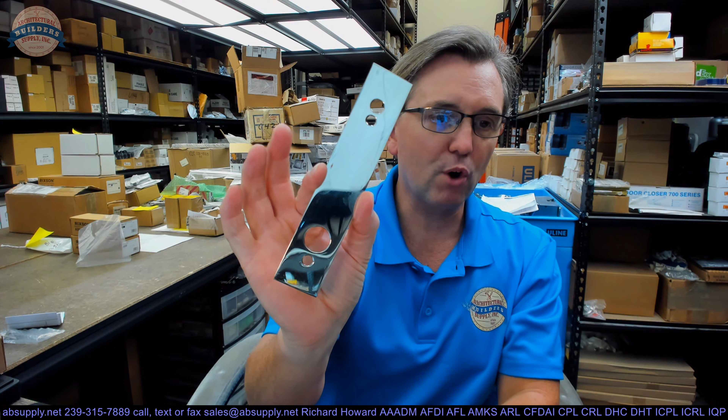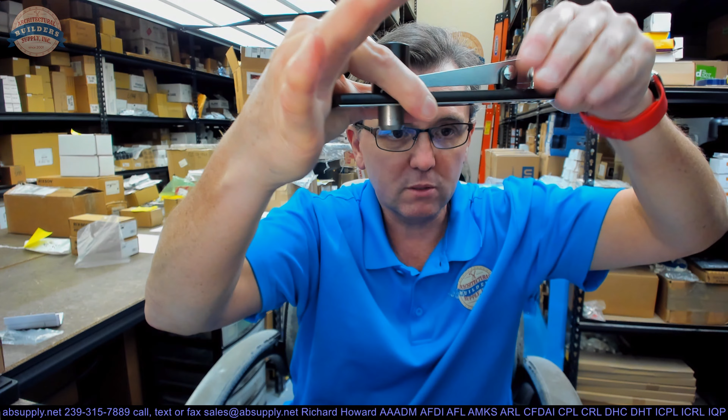That's going to fit over this unit just like that. Spindle's going to come out. You've got 2 holes here for the screws to hold the plate on. Okay, and as I draw that bolt, I'm going to drop my spindle down. And you do that with that slotted screw that's there. Really simple, really easy. Now, I think what we'll do now is let's switch to the screen view where we can take a closer look at all of the supporting information.

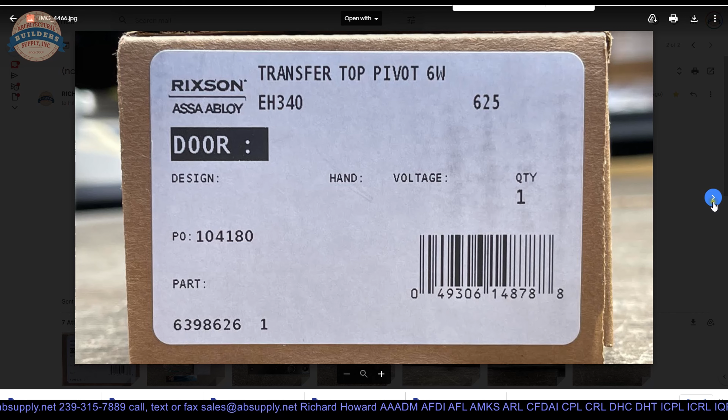Okay, here's the item that we are looking at, and let's take a look at some photos that we have posted down below. Here is the picture of the box, the label from this order, the contents of the box, header portion and the door portion. The header portion with the pin extended. By the way, that extension is, and it'll be listed in the catalog, but its maximum extension is probably about 3/4. Indeed, that's what it is, 3/4 inch. So you're going to have a 3/4 projection into the top of the door, showing the hole that will accommodate easily those 3 pair of wires.

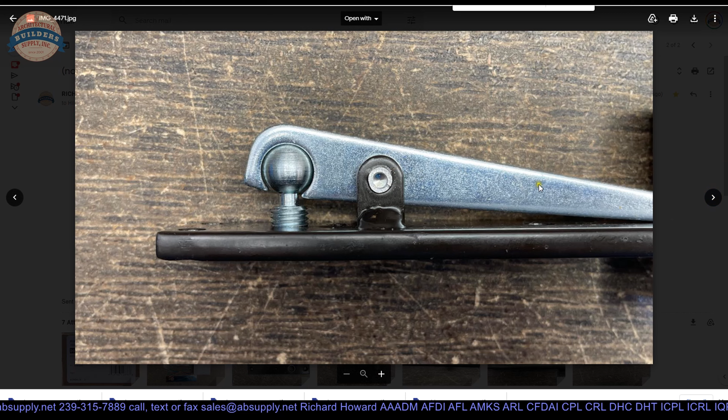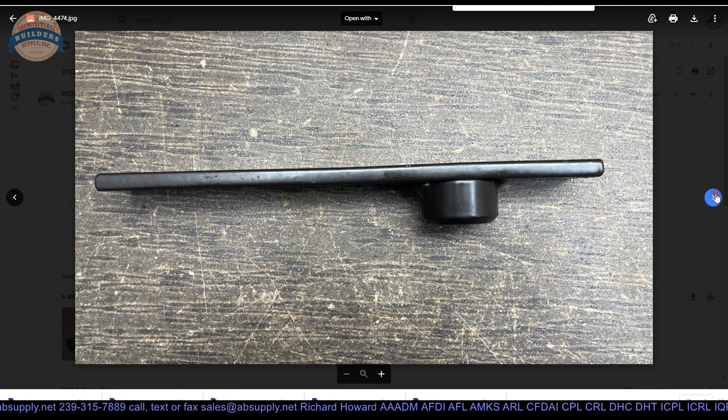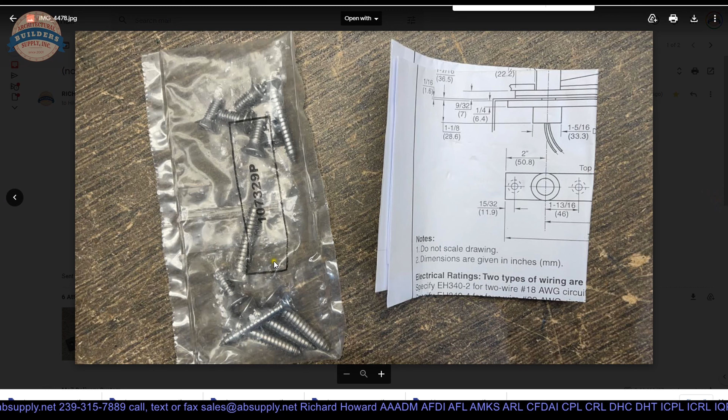The walking beam portion, that's what controls the spindle, the top pin going up and down, in and out. That's showing it retracted. We have the top door portion here. Its side view. Thrust bearing there. The finished plate. Again, I believe that's 629. Your wires, your 3 pair. The colors don't matter in the sense of they're just color-coded for your identification end to end. And then, of course, the screw package and your installation instructions.

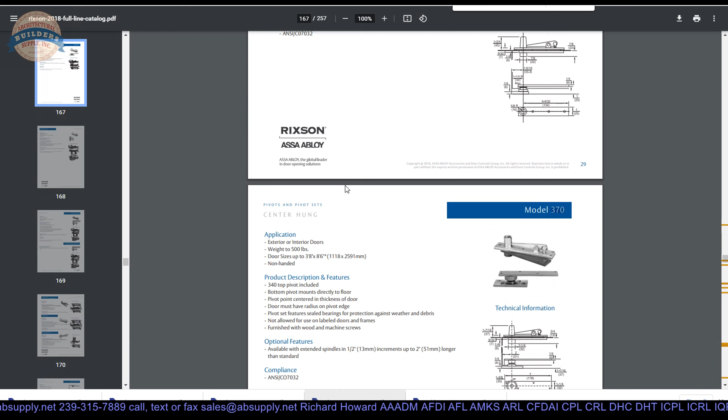Okay, now let's take a look at all of the supporting documentation. Let's go through these documents in no particular order. This would be the cut sheet, the EH340 center hung. We discussed that at length. Just to put a finishing touch on that, let's go to the item that we're looking at, the link here to the manufacturer's page. Pull up the full line product catalog, and then we're going to get to the pivot section. This catalog has the pivots starting at about the 138th page of the document.

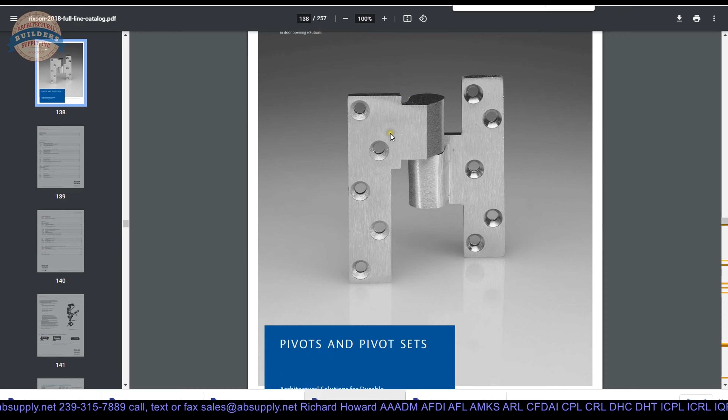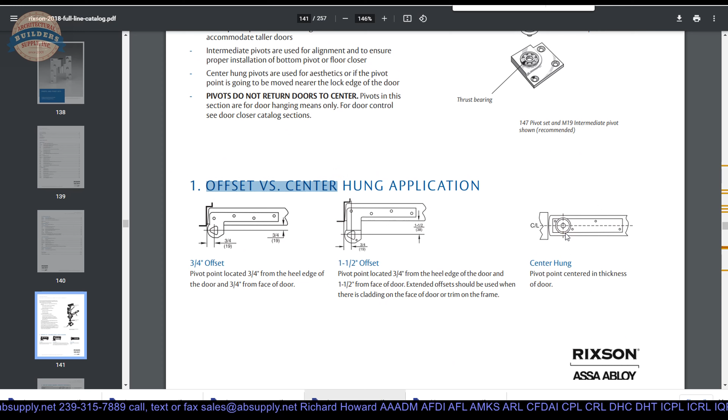The point is in the beginning of the catalog, it will give us an explanation between offset and center hung. It's all where the vertical axis of pivoting is in relationship to some reference point of the door. If it's center hung, the reference point is the center of the thickness of the door, and then the dimension from the jamb is determined per the template, but it'll always be in the center of the thickness. Does it have to be? I know that I've done unusually thick doors where I knew the client was not putting that in the center of the door. I would say it doesn't have to be, but the hardware is definitely designed to not carry a lateral load in that sort of fashion.

So at the end of the day, I wouldn't personally feel that it's a major error or mistake, but unless there's a reason to bias it towards one side or the other, just leave it right in the center. I have had it scooched over to accommodate some weather stripping that we've put there, and that's worked out without any trouble.

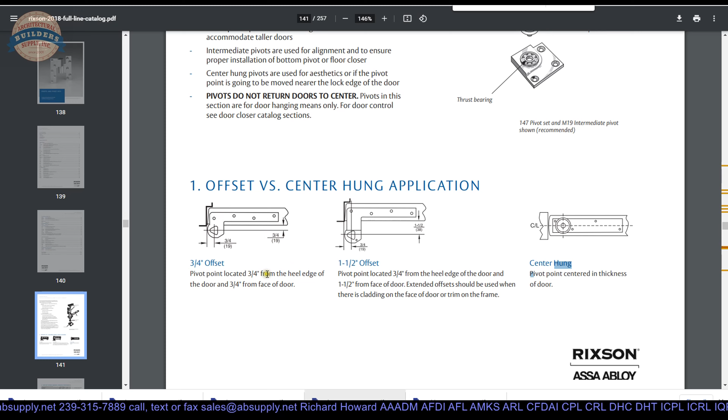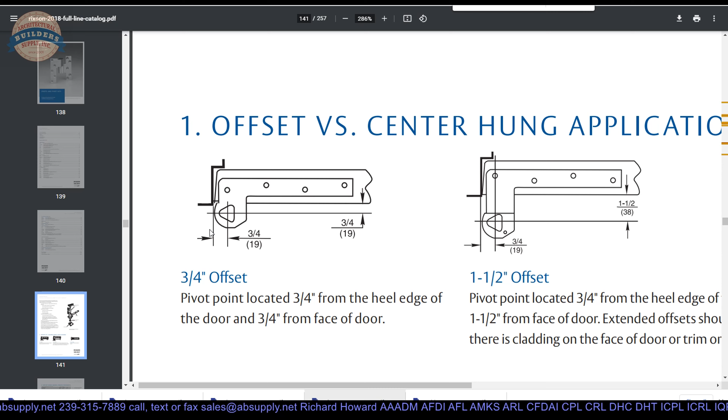If it's offset, that reference point is different. It's now the face of the door on the pull side. And we can see that right here. The face of the door to the center line of the vertical axis of pivoting is either 3/4 inch or 1.5 inches. Those are the only two sizes that you'll get. And the difference between these two is the 3/4 inch offset is by far the most common. That's what you're going to see everywhere. Unless you specify an offset, it's going to be understood as a 3/4 inch offset. The issue with Rixson, as far as my experience goes, is that they use the term 3/4 in part numbers.

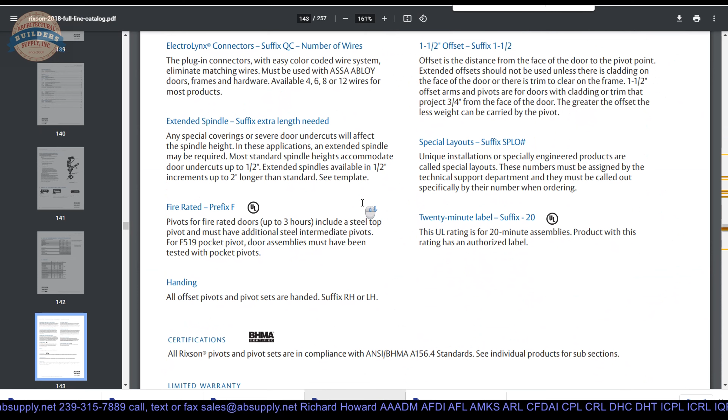So 3/4 can be an offset, or it could be part of a part number. So let's just scan through here and look. So they've got a 117-3/4. Well, you're tempted to think that 3/4 means something. No, it doesn't, in the sense that it doesn't mean anything dimensionally. It's just the part number.

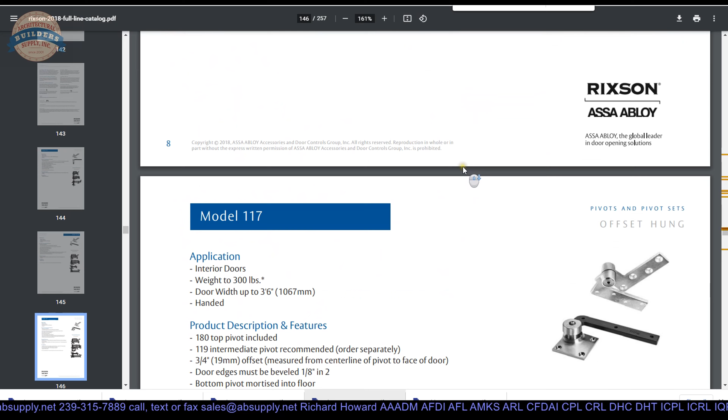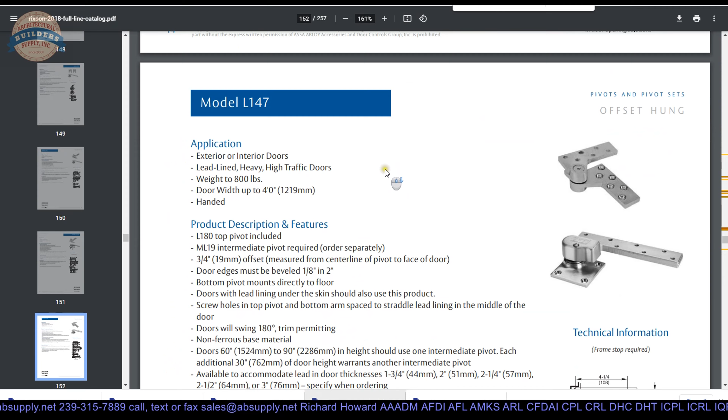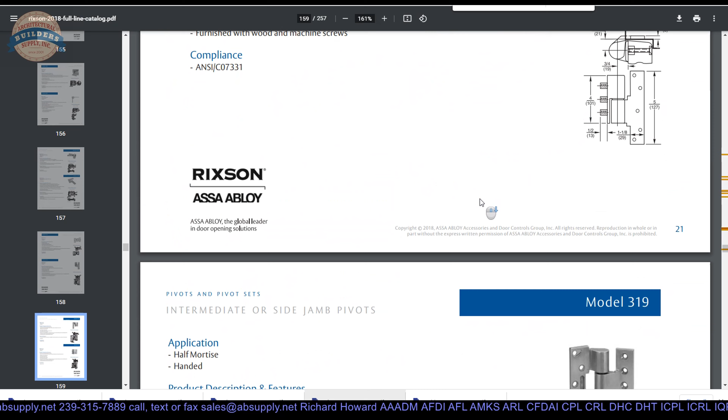So as we scroll through here, there's one with a -1/2. Okay, so half of what? There is a 117, but that's a 117-1/2. The point I'm making is, and I'm going to get to it because we're in the intermediate pivots. We're going to scroll into the offset, the center hung pivots now.

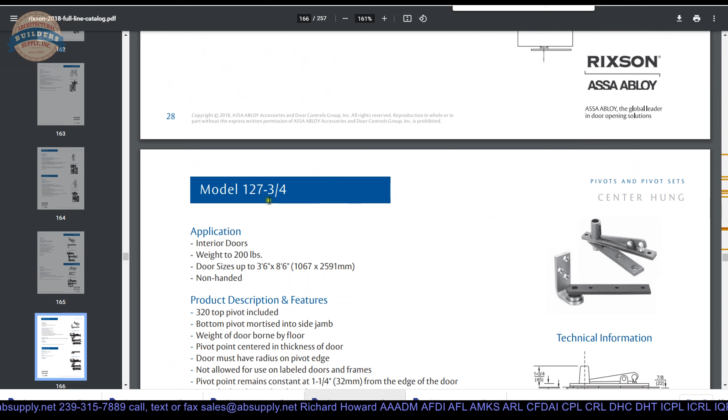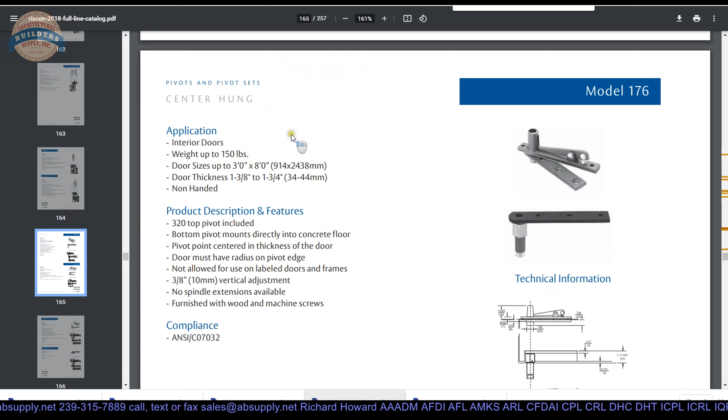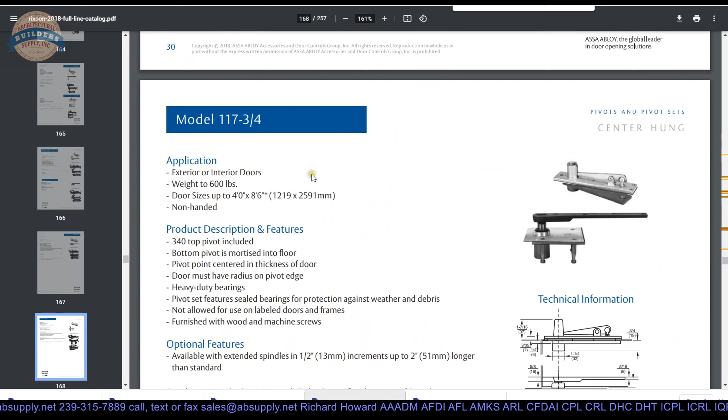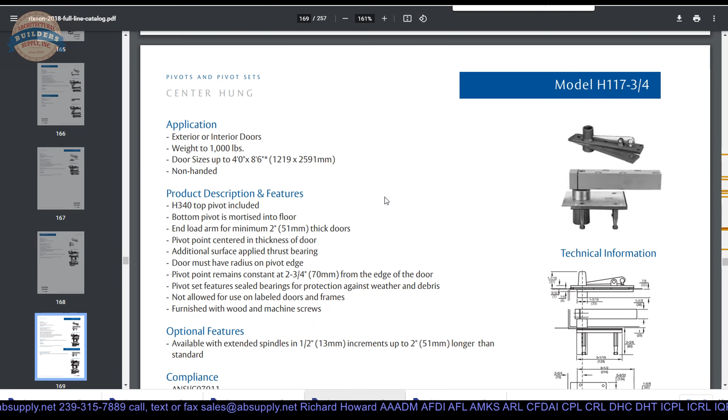So here's a 127-3/4. That can be confusing because nothing on here is really 3/4 inch. That's a center hung pivot, but why they call it -3/4, I just don't know. 127-3/4, 128-3/4. There's obviously a reason for it. I just don't know what it is. 117-3/4, H117. So be mindful when you're using Rixson part numbers. Be wary. That does not mean 3/4 offset.

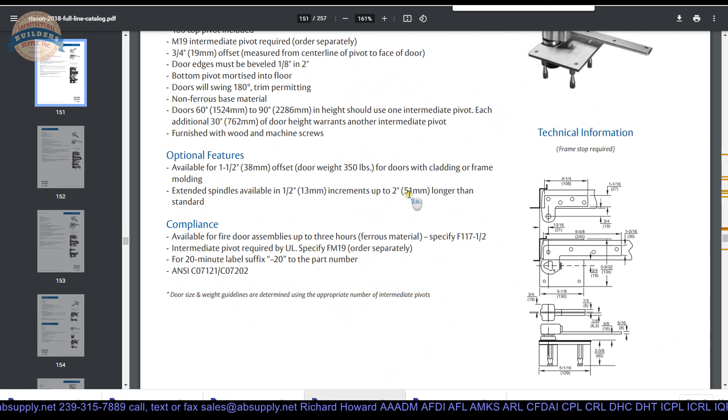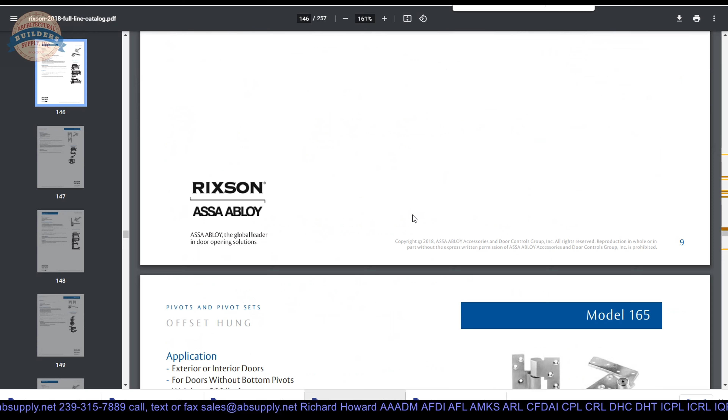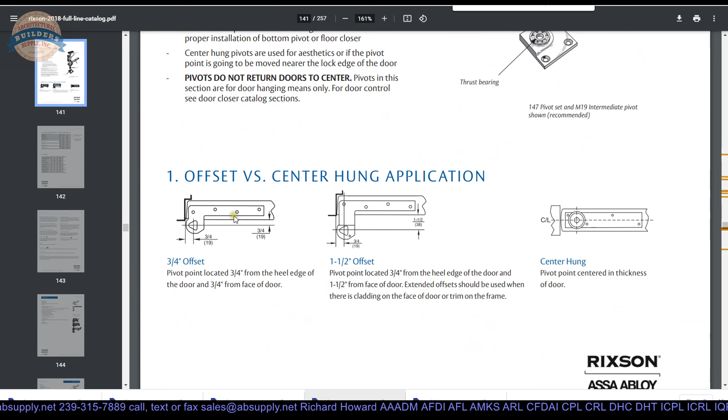I've bumped into that in the past, and I know very early on in my career it was something that I was confused about. I can tell you that one of the best things you can do to edify yourself is to just read the manufacturer's catalog. These people, Rixson, and all of their sister companies, have been in the business of architectural hardware for decades, and their approach to explaining it is tempered on decades of experience. So that's our application. 3/4 will be considered standard.

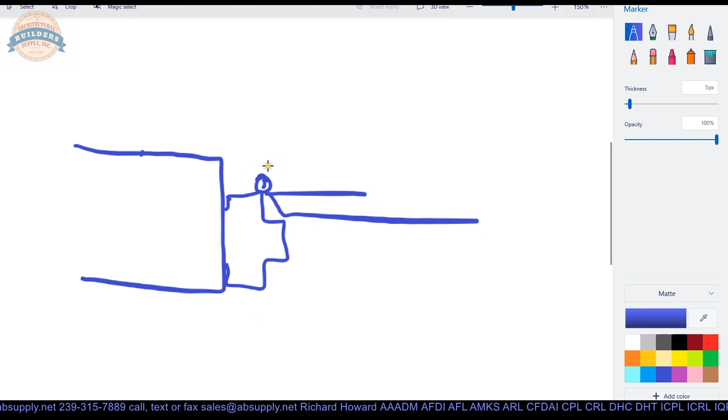Now, 1.5 inches, why would you use that? Well, you would use it when you need to move the vertical axis of pivoting out and further away from the face of the door. That could be because you have unusually thick casing. Here's an example. What if you wanted this door to get to 180 degrees? Well, if you have a 3/4 inch offset, you're going to get out to about here before anything happens. That'll be your maximum degree.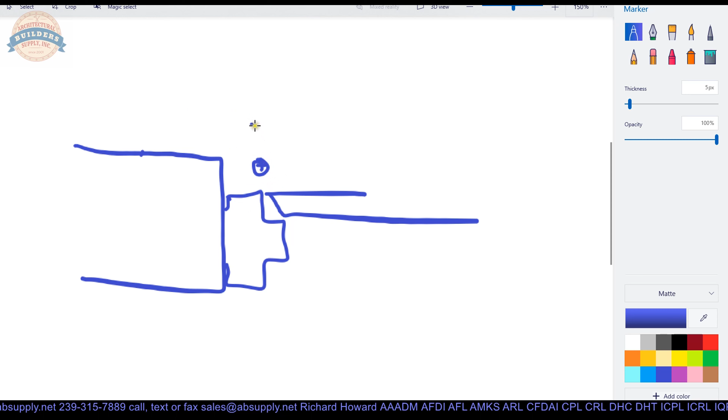So when you move that vertical axis of pivoting further away, say 1.5 inches, you will then be able to get your door out and around. So if we go from 0 to 90 to 180 degrees, that's why you're going to want to relocate that center line further out.

It could also be that you don't have a need, and I've done this in the past. You don't have any sort of clearance problem like here, but I've done work for a client where they took a 1 3/4 thick door and then applied to the face of that 3/4 inch thick MDF, because they were running the baseboard along the face of these relatively concealed doors. And the application would call for an otherwise standard pivot, but I didn't want the client mortising into this MDF base.

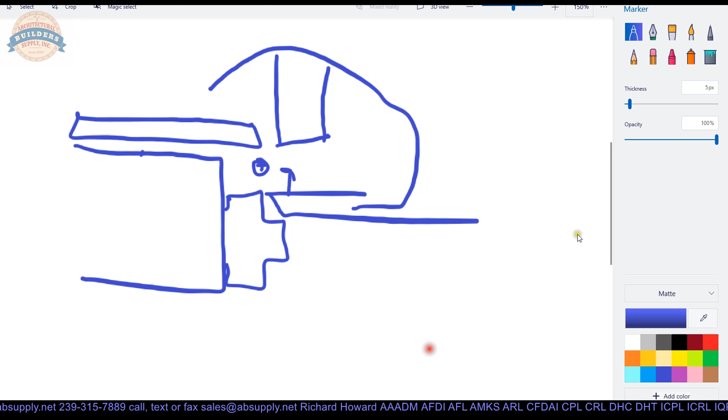So we went with a 1.5 inch pivot just to move the hardware back to get it under solid wood to mortise to. I can show you here. I'm going to scroll through this video to show you the client's application. There it is. Baseboard, which is MDF. Nothing that you could screw to or mortise to. So obviously a pair of doors. And that's exactly how we solved the problem.

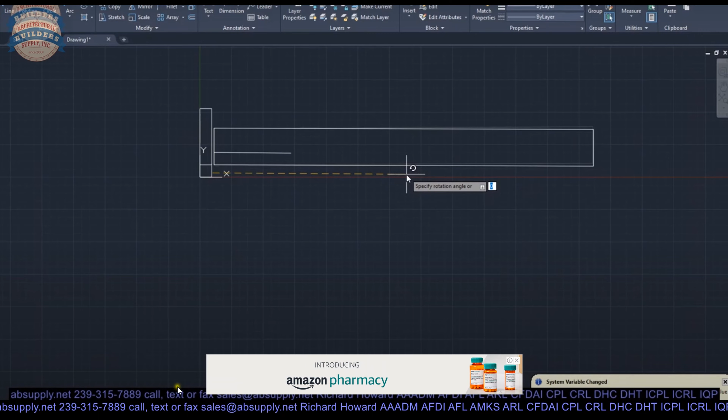What happened is the client did a job where they used concealed hinges. And he found out that it didn't work for his application because he wanted the doors to go past 90. And that means relocating the center line, which is exactly what we did. And then I basically put together an AutoCAD scenario showing the client when we moved that vertical axis of pivoting, because it was stuck.

Sorry, that video keeps moving on me.

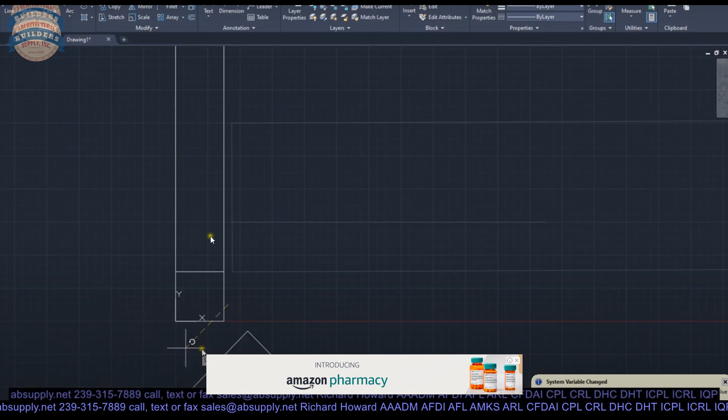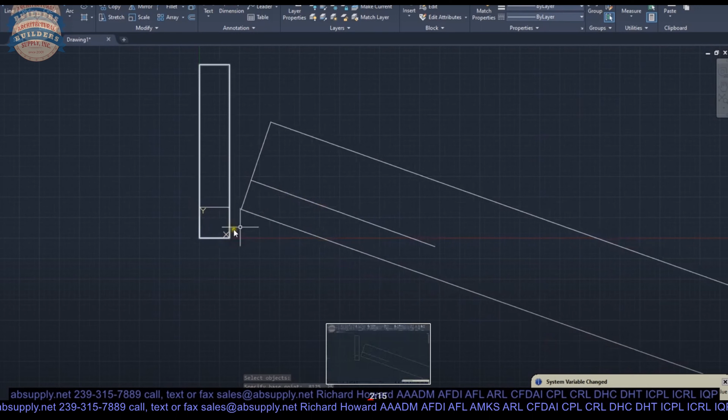He was stuck with what he had in here. So we're moving the vertical axis of pivoting out here. And what we can do is supply you with the necessary hardware to do that. You're going to see the pivot point down here. And that represented the added 3/4 inch thickness. This line represents the additional 3/4. The arm is going to go.

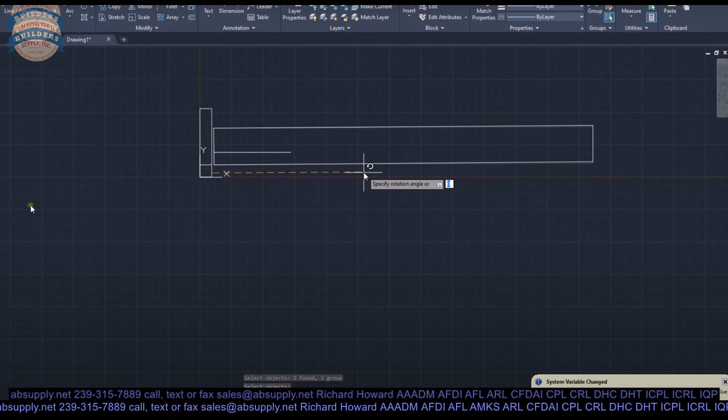And just drawing in the pivot to show how we're going to get around that material. Can you do it? Absolutely. Is it going to work? Use a pivot. You cannot use an invisible hinge. So we also had another application where a 1.5 inch offset was used, where we did have a clearance problem, and let's take a look at that. I'm going to pull up some pictures of that project.

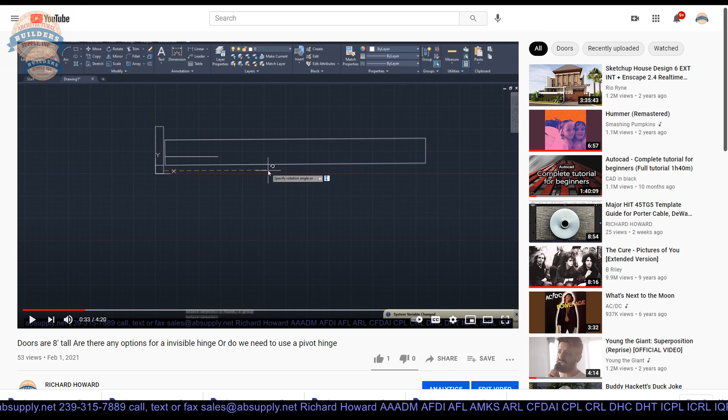And actually, this is not an uncommon problem. We've had to do this in the past where there have been, frankly, rectangular, regular shaped doors within a deeply inset opening. And while it's just rectangular at the top, it's the same problem. You can only open the door so far before it hits that outside.

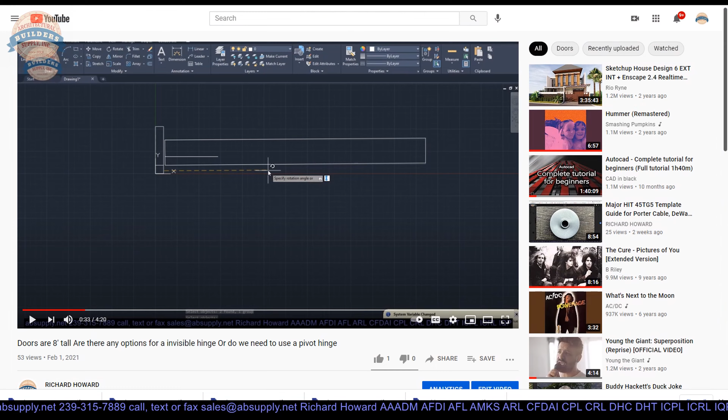That's a detour when it comes to offset and center hung, that's for sure. So let's go to the next document.

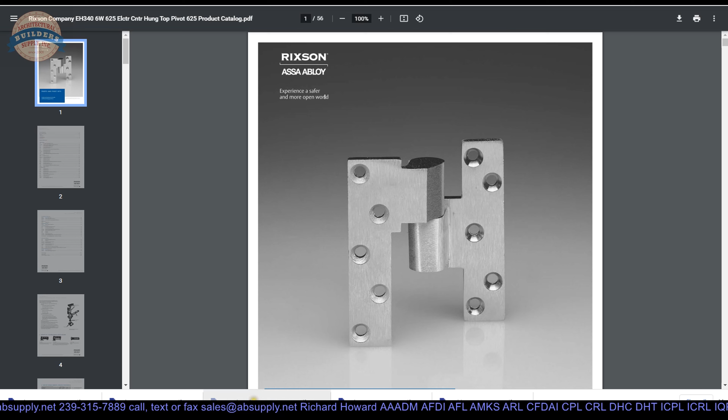This is the product catalog. This is all things pivot hardware related. I don't think that we need to dive into that anymore, but let's finish up our cut sheet, which is where we were before I went down that rabbit hole.

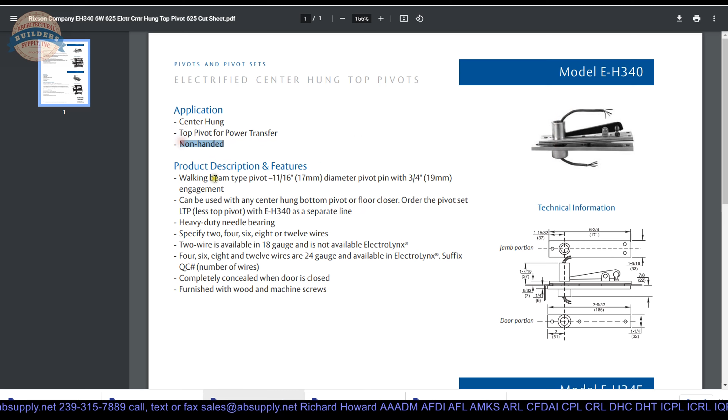Top pivot for power transfer. You're going to be able to fish wires through that top pin. Non-handed. Center hung is technically non-handed.

This is a walking beam type pivot, which has everything to do with this. As you rotate that ball set screw, you'll lift the pin up and down. 11/16 diameter pin, 3/4 inch engagement projection. Can be used with any center hung bottom pivot or floor closer.

Order pivot set less top pivot with EH340 as a separate line. So what does that mean? So if you need to transfer power into the door, there is no way to order, say, that H28. Well, that's a bad example. There is no way to order the 117-half

center hung heavy duty bottom pivot with an electrified top pivot. So what you do is you order that 117-1/2 LTP, which means less top pivot. They're going to strip out the top pivot from that otherwise complete pivot set, make the deduct, then you're going to pick up the add for the EH340 as a second line.

You'll specify obviously your quantity of wires, your finish, your fastener package. Heavy duty needle bearing, I said thrust bearing earlier, that's a needle bearing. Specify your wires. You can get all of that in an ElectroLynx configuration, which is just a quick connector. They can do 2-wire, and those 2 wires are 18 gauge if you happen to be doing something that requires a very heavy amperage or high inrush.

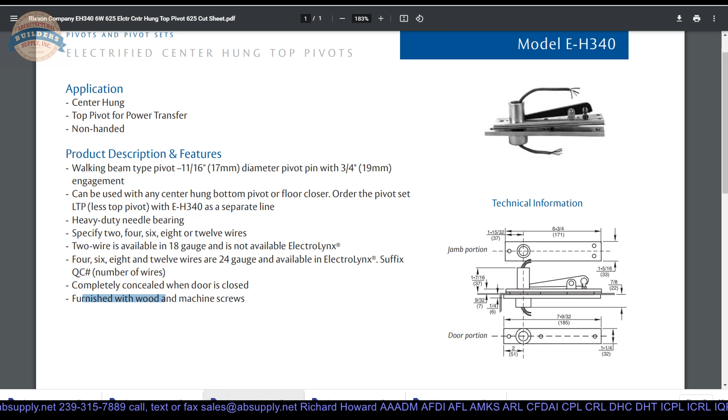Let's take a look at this, the installation instructions and the template. The installation instructions have everything on it that the template does, dimensionally. You don't need both documents.

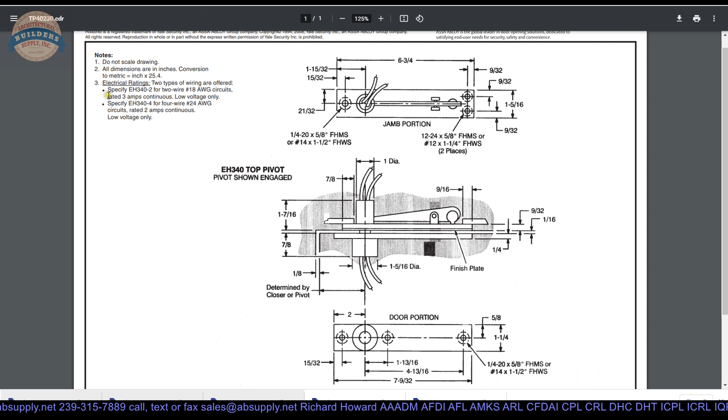It does tell you that you've got 24 gauge wires. Be mindful of that when you're wiring something to be sure that this isn't too thin for your application.

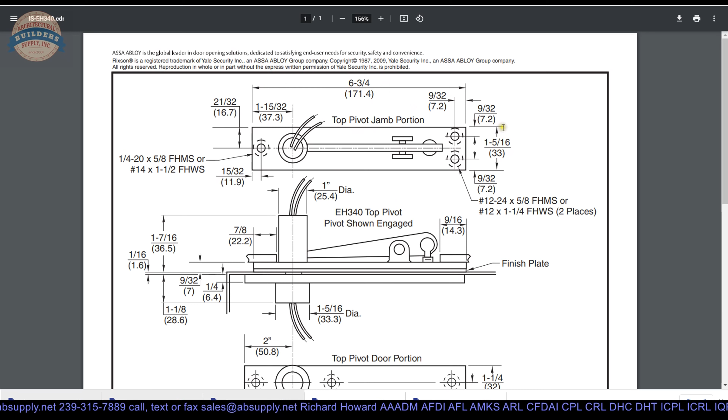So let's close off the template. Let's look just at the installation instructions. We went over the dimensional properties first. And what you're going to note is you've got the width, you've got the depth, you've got the thickness of the item. And it's shown here.

You just, with all things Rixson, you have to study it. But I assure you, I've been studying these for years, decades in fact. All the dimensions are there. So we know that we've got on the header portion 6 3/4. There are 4 things we need to know. Let's go over those 4 things. Well, there's more than that, but it's the 6 3/4 long, 1 5/16 wide.

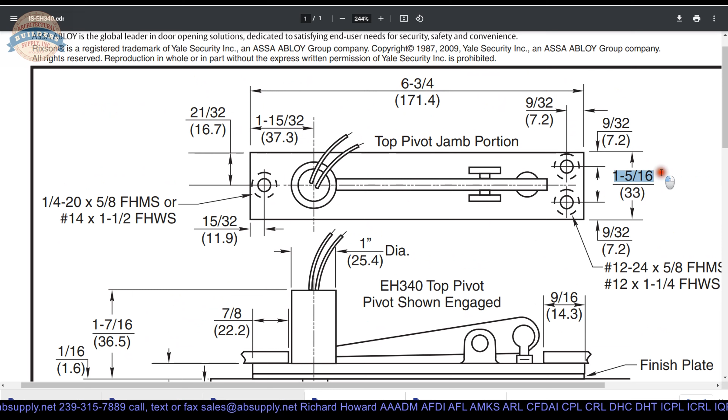Its thickness is going to be 9/32 from the underside of the header to the depth of the prep. You are going to need to drill this hole in the header. They say it's 1 inch diameter. Because your plate is 1 5/16 wide, I wouldn't worry about drilling this 1 1/8.

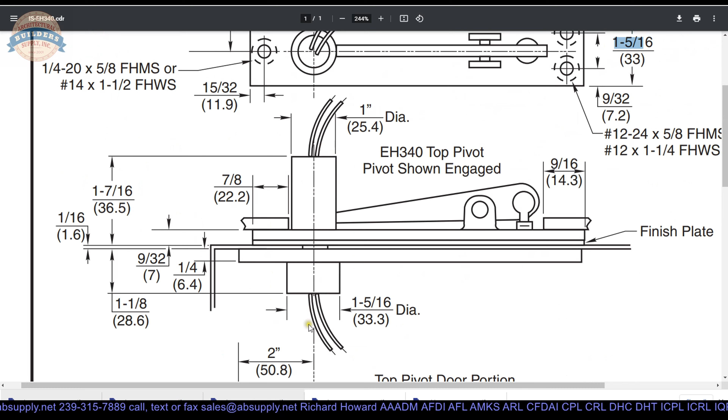So you need to know the length, the width, and the thickness, but then you need to know, where do I place it? That's not on here. It's not on here anywhere. The vertical axis of pivoting—that's where you're going to default to the hardware that you're installing it with.

So let's say that we were doing a 117-3/4.

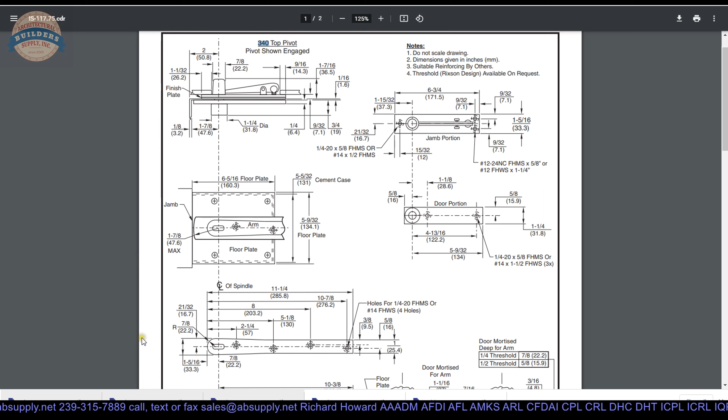117-3/4. Okay, so we've got an EH340 that's going to go with this, and we're going to do an LTP on this 340 top pivot. Now, this is where it's going to tell us what our center line of our spindle is going to be. And here it is.

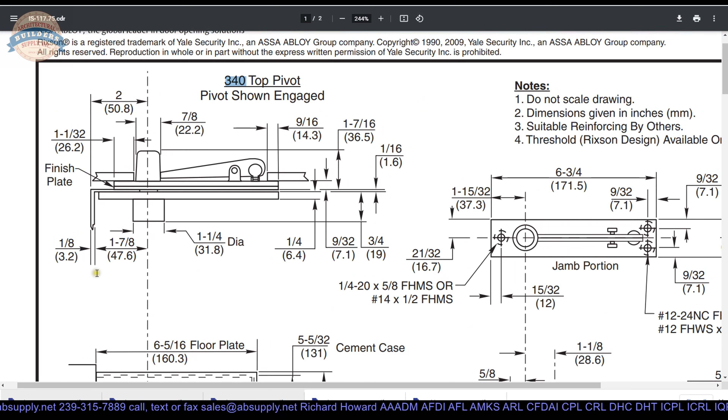From the jamb to the vertical axis of pivoting is 2 inch. And that would work for the 117-3/4. That'll give us that vertical axis of pivoting. So those are the 4 things that you need to know when you locate this. The door portion is the same logic. It's 1 1/4. It's 7-9/32. It is 1/4 inch thick.

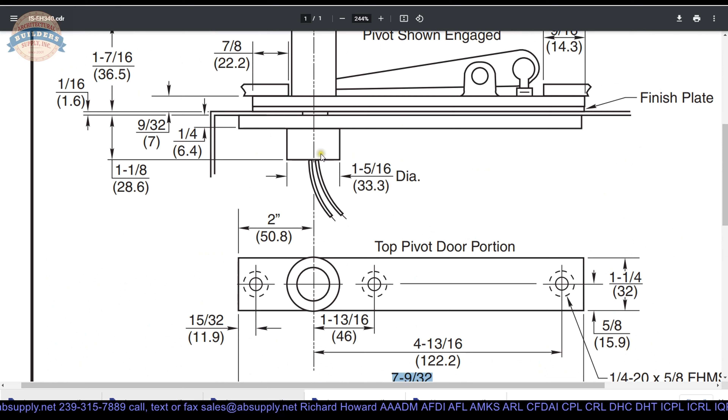Now you know how to prep everything. Then you're going to need that hole down in the door for the spindle to come through. Then obviously your raceway to wherever the wires are going to. They tell you, well, here it says 22 gauge, and that makes sense to me. 24 gauge seems incorrect. Even though this document's 12 years old by now, when you see wiring diagrams for hardware, I don't see 24 gauge wires, I see 22 gauge. So I'd be tempted to say that these are indeed 22 gauge.

Prepare door and frame per the details that we just went over. To make sure it works, that vertical axis of pivoting has to be completely plumb, all the way down to the bottom pivot. Now, you're going to have the header portion installed. The wires are going to be coming down through the top pin, and they're going to be hanging out of the opening. So, connect the wires in the door frame and install the jamb portion with the pin retracted. Place door on the bottom pivot and raise the door so that it's within 2 feet of the top of the jamb. This is a two-person job for sure.

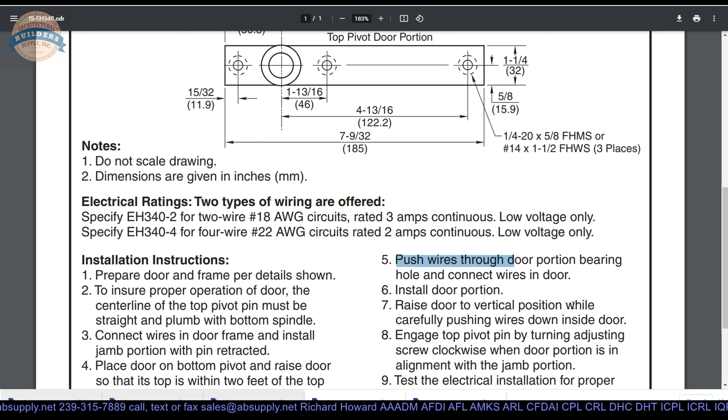Push wires through door portion bearing hole and connect wires in door. So the door portion, run the wires through there, connect the wires together in the door. Attach the door portion. Now you've got a bunch of wire hanging. As you then push the door, now at this point the door is hanging out of the opening, being held by someone precariously probably. You need to push the door up as you're pulling the wires down into your door to take up the slack. And when you get to the very end, be very, very careful to not pinch those wires.

Raise the door to the vertical position while carefully pushing wires down inside door. Engage the top pivot pin by turning the adjusting screw clockwise. You'll drop the spindle down. Test your wires. Just do a continuity test on the wires at that point, and you're in good shape. Yeah, that's everything. That's all the documentation.

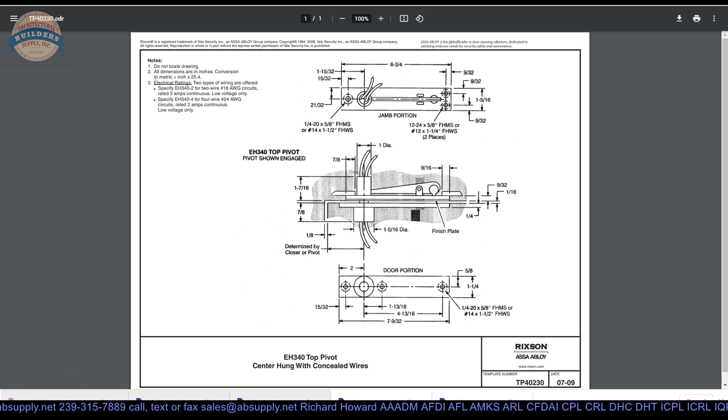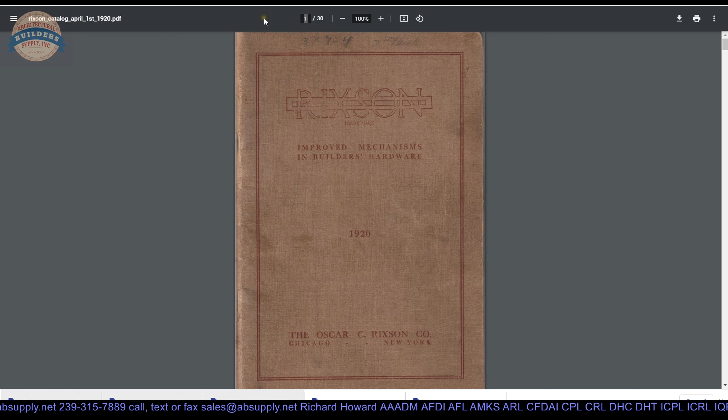But also, for fun, there's a full product catalog from 1920. That's an interesting document. By the time you're seeing this video, there will likely be other archival catalogs there. I know that I have some others. They're just not in the site just yet. It's a lot of work to scan those and get those uploaded. If you want to see what Rixson was doing 101 years ago at this point, there's the document.

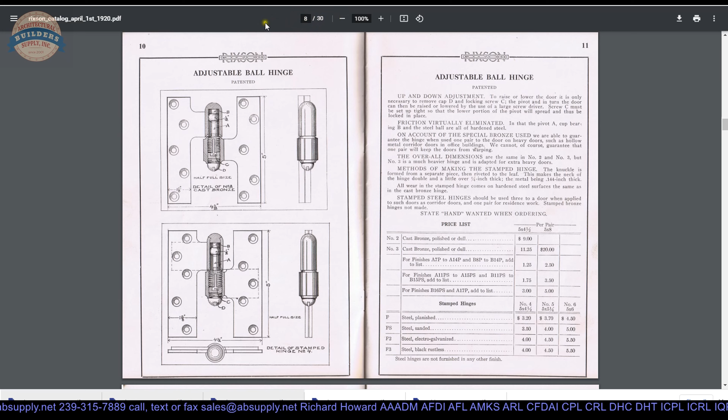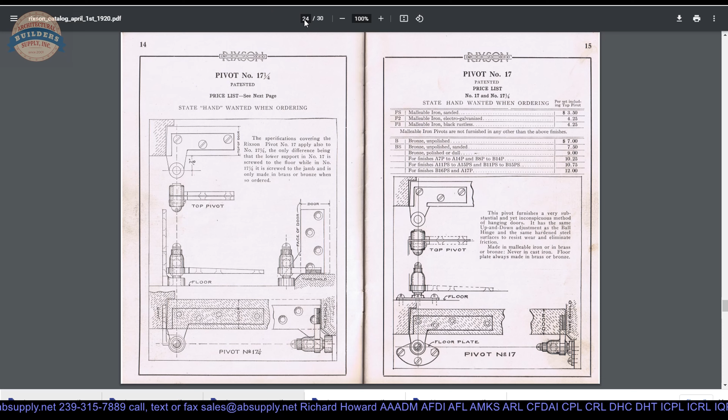Olive knuckle hinges. Pivots. There's a number 17 pivot, 17 1/4. You can see where it all comes from at this point. I know they have some floor closers near the rear of the catalog. Let's take a look at those. There we go. It's number 20 and 25. Those part numbers were used very recently as well. I know the 10 and 15 is here. Yeah, double acting floor check. I think they call those the Duo.

We can repair these if you have one of these very old units, either in a commercial application or a residential application as well. They're not uncommon to see them in residential applications. Doors between dining rooms and kitchens will have these in older home construction, obviously from the 1920s, most definitely. So fun little document there to dive into.